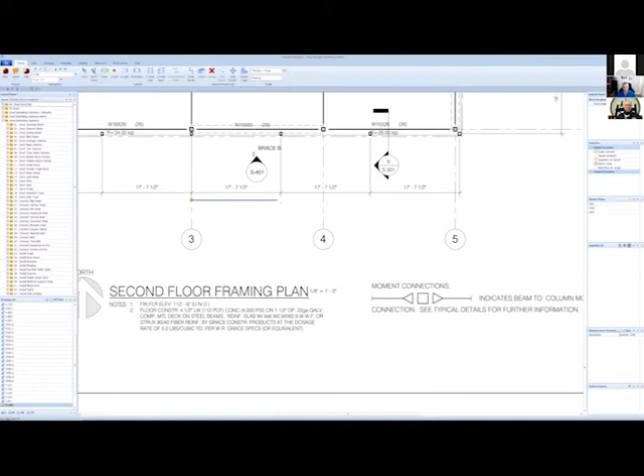I'll say this too before I get too deep in: this is going to be a very high-level overview because we're kind of limited on time, so I'm just going to hit the high points. But when you go digital, it's very simple. You're getting PDFs right now through email. You upload those PDFs into the software. Then we come in, we check the scale, and we set the scale, 1/8 inch equals a foot.

You always have to verify that the scale is correct. Once we see it's set up — I'm just going through the quick setup process — you'd go through, set the scale on every drawing, and then go to the first detail drawing and set up all the detail pages. It's very simple to do. I just go to the first detail sheet, come over to name view, enter in that sheet number for the detail, and go through every detail drawing to set that up.

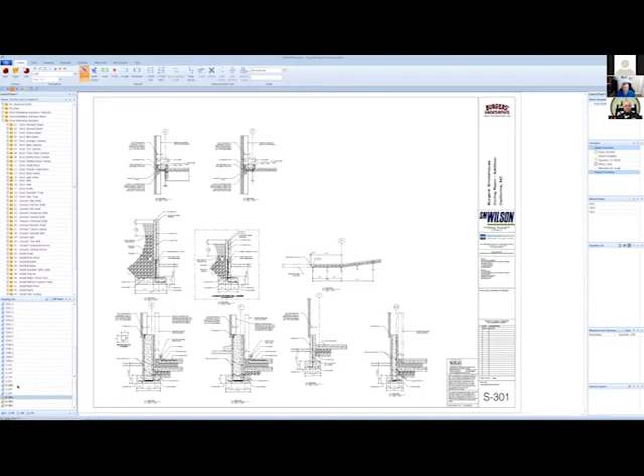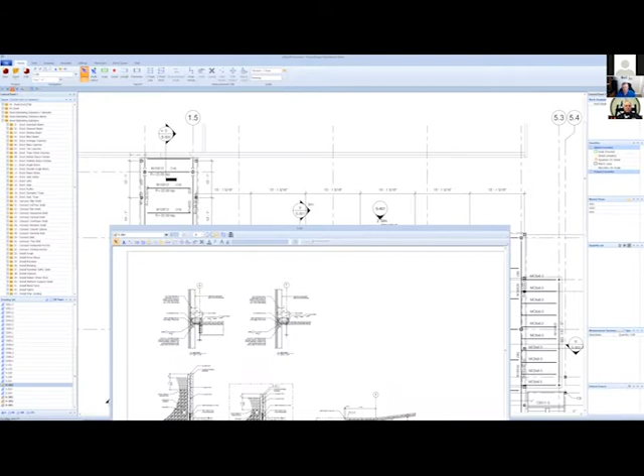The benefit of doing this is now when I go to the drawings — right now, when you have a hard set of plans, you flip to that detail, then come back to your plan to do the takeoff. When you go digital, it allows me to set up these detail drawings that will come up on a second window on my second monitor. If I need to go to detail 5 on S302, I use this little binoculars tool, do the drop-down, and now I'm at that detail page. If I need to go to S401, drop down, and I'm at that detail page. So it lets me jump back and forth, looking left to right, to navigate through my details.

Now, as I mentioned, we set up all these tools, so I'm just going to jump in there and show you how I'm going to take off these beams.

And this is where the speed really comes in. I mean, I can come in here and double click on it and go count each one. But when we're going digital, that's not the plan. The plan is to pick up speed. So what I would do is have the system find these beams for me, and all I do is select my trace, bubble around it,

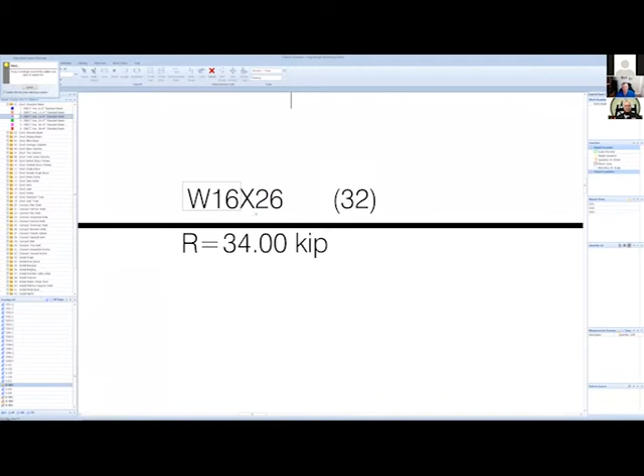and now it's going to go through here. It's going to find me all these beams that are on this page. And the nice thing about eTakeoff, while I'm waiting for that search, I'm not just sitting there with dead time. I can continue to do my takeoff.

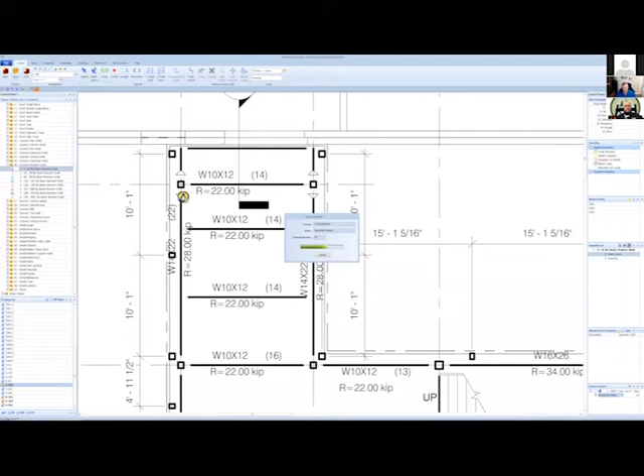So we see here we got some moment welds. So I come over here and select my moment condition. The steel erection bid wizard goes by pounds per foot. So I'll select the corresponding poundage and count those. And like I say, the nice thing about it is I can continue to do takeoffs while that search is going on, counting all the beams. So I could come over here to perimeter angles, grab my angle.

And just for an idea, this little building we're looking at right now, it's a 3-story building, about 48,000 square foot. And for me to do a digital takeoff on this, from bringing in the plans to getting the price in the steel erection bid wizard, it takes me about 45 minutes. And that's a 100% quantity detailed takeoff. So it really, truly speeds up the process. So when you take off the angle, now we got a pure quantity of what the angle is.

Another nice feature, let's say we have kickers going from 1.5 to 5.3, 2 foot on centers. I could come over here, select the kicker. If they're going 2 foot on centers, I go over here on the right-hand side and I give it the multiplier 2 foot. And then I can click at the starting point, click at the ending point, and it just counted me 45 kickers from that point to that point.

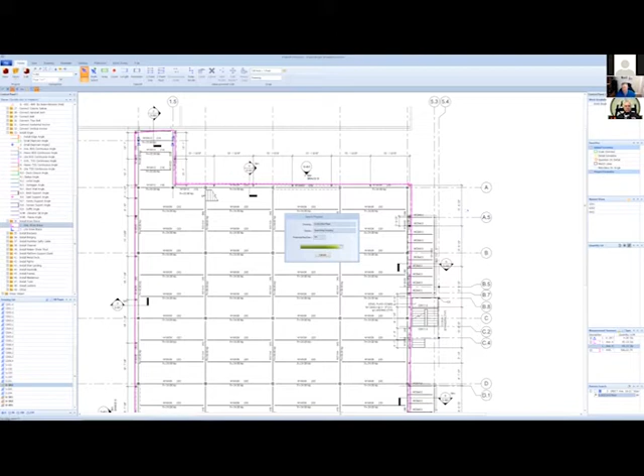And so when we're using the steel erection bid wizard, it does require a 100% quantity takeoff. I have to count every piece and enter it into the system to get it. And the beautiful thing I think about going digital is you can do this quantity takeoff very quickly. So now when you got your price, you know you've picked everything up.

Stairs are very simple to take off as well. Stairs, rails, and landings. And just to point out too, we're still searching for beams, but like I said, I continue on. You could bring a PDF in or you can bring a TIFF. If I bring in a TIFF, it's quicker on the search, but it has its downside. So I stick with the PDF and I continue to do work while that process is happening.

So once that search is done, we're gonna get a window that pops open. I have to go through here, and if I see these things as W10s, I uncheck them, they turn white. I just want to verify that I'm searching for 16 to 21s, which is based on my production rate in the steel erection bid wizard for that beam size. So I would go through and highlight everything that's a 16 to 21, and I'd uncheck everything that's not.

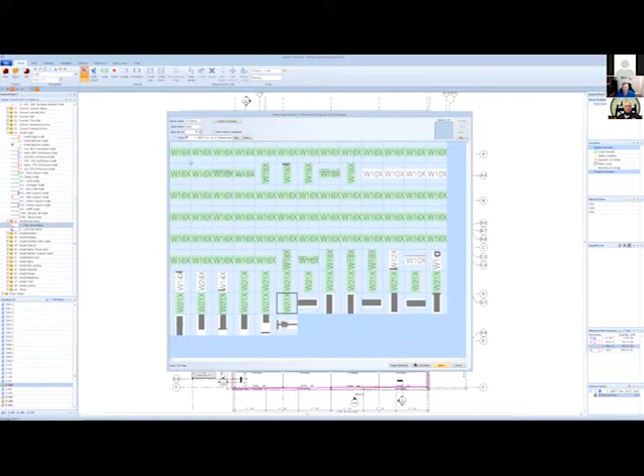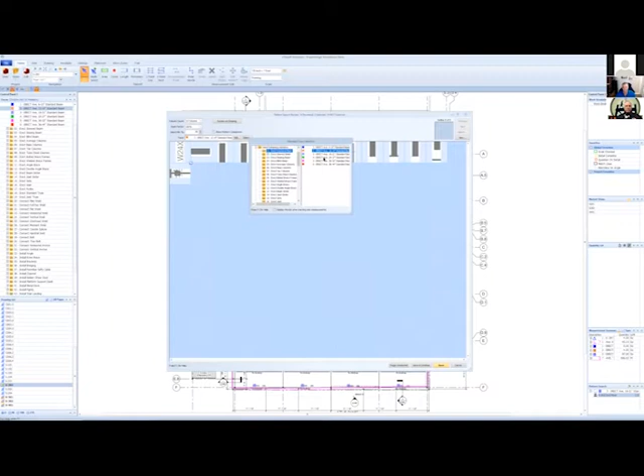Once I've done that, I will hit save and continue, and it leaves the other beams in, which is nice because I don't have to do another search for them. Then I highlight those ones, save and continue, go to the 12 to 14s. And once we filter through all those, now we'll look at the plan and you'll see every beam on the page is counted. Just to jump in there for columns too, to get that idea. It's a 3-story building, so I'm gonna go with the 40-foot average column.

Now, granted, I could come through there and click on every single one, but going digital is about getting speed. I keep saying that because for me, that's what it was all about. I could take off that one column line. If I have other typical column lines, I can go ahead and just copy it and drag and drop to the other like columns. So I'm not sitting there clicking away all day long. I multiply my efforts by just doing the drag and drop and take off all the columns. So that's a quick way of the count.

One thing to point out too is a lot of times you guys are out there, you get 70% drawings, and then they send you out 90% drawings. My thing about steel erection with eTakeoff is, once they send me the 90% drawings or 70% drawings, I can come over here and do a compare drawing.

And when I select that and then overlay the new drawing over my takeoff drawing, everything that's changed on that plan comes out in red. So right away, I know exactly what's changed on the drawing and now only take off what's in red. So it really helps out in that process. Instead of bidding that job 3 times, instead of looking at that job over and over and over, we can just do an overlay, see what's changed and carry on.

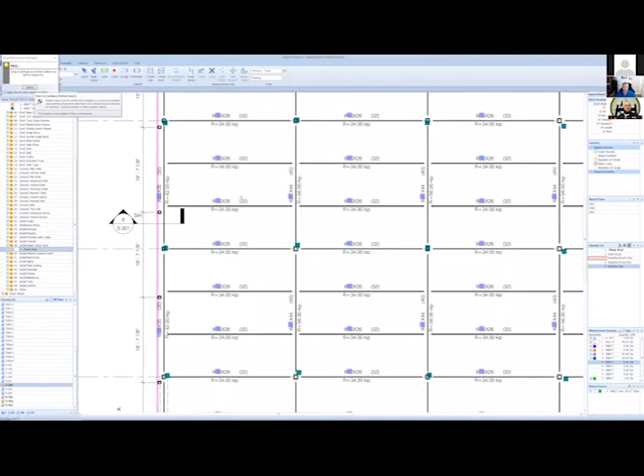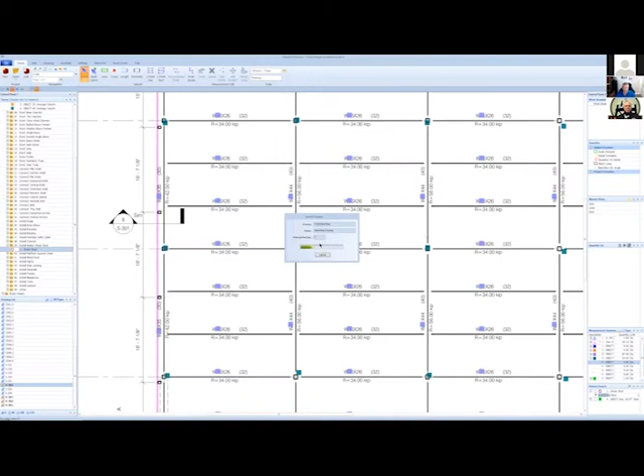One of the hugest reasons that I switched is shear studs. Let me just show you how that works, because I can have the system count these shear studs for me, and I could not do that in On-Screen Takeoff. All I do is the same type of search function, rope around it, hit search, and as you guys know, in shear studs, it's very painful to count every one of these 32 in brackets manually. And when you can get a software that will go through there and count them, and then add a multiplier to it, it just makes your life so much easier.

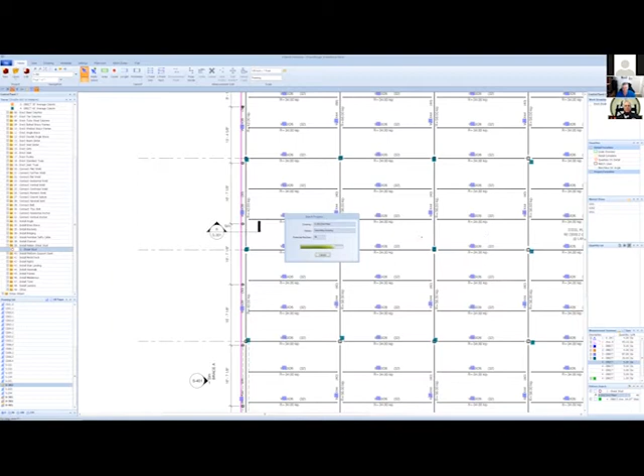So On-Screen Takeoff is a great software. I used it a long time, but I transitioned to e-takeoff because I feel it's allowed me to do some things that I couldn't do within On-Screen. But by no means am I knocking On-Screen, because I integrate with them as well. I integrate with Bluebeam, with PlanSwift. So it's just my preference to do this.

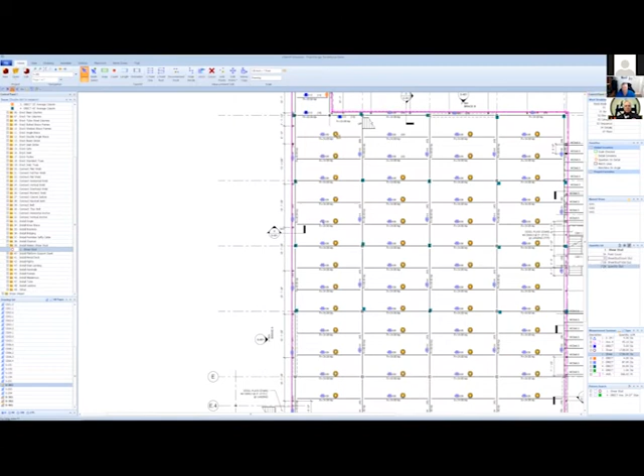So now that the search got done for the shear studs, I just verify that everything's 32 in brackets, hit save. Then I would click on it, assign the multiplier of 32, and we basically just counted 1,728 shear studs. And let me show this too. When we're inside of e-takeoff, as you're doing your takeoff, you've got this little legend that is being built. So every time we take something off, this legend continues to build. I'm gonna go ahead and jump out of here and jump into the Steel Erection Bid Wizard.